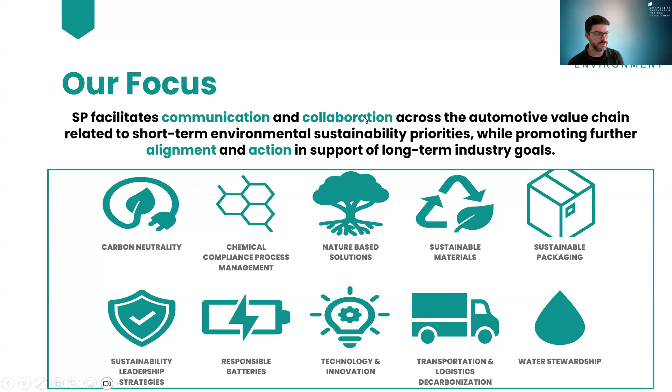As a quick introduction, for those who might not be familiar, Suppliers Partnership for the Environment provides a forum to bring automakers and suppliers together to collaborate around environmental sustainability goals for the automotive industry and the extended value chain. Our work today has focused on facilitating communication and collaboration across that value chain around shared environmental sustainability priorities and goals of our member companies. While those goals encompass many things, sustainable materials is one big component. In recent years, we have seen an increase in sustainable material content goals among our member companies and others in the automotive industry, and within Suppliers Partnership we have been working to improve understanding of the different ways these goals are set and measured and how they extend and relate to the supply chain.

For today's meeting, we're pleased to have two of our member company representatives from Ricardo here to share the results of some research they have recently completed on behalf of an organization in the UK regarding sustainable material trends, challenges, and opportunities specific to the automotive sector. To get us started, I will turn over to Andrew, the head of circular economy for Ricardo, to introduce himself and his colleague, Michael.

Thank you very much, and hello everybody, and thank you for joining our call today. As you've already heard, I'm Andrew Dunwoody, head of circular economy at Ricardo. I have over 20 years experience in the waste and circular economy sector, but I've been leading the circular economy team at Ricardo for just over 2 years now, where we look to create circular economy strategies, create circular economy indicators, and also promote sustainable packaging and procurement with our clients across a number of different sectors, both public and private, but obviously with a lot of focus on the automotive sector, where we have been working with tier ones and OEMs internationally on their circular economy approach for quite some time now.

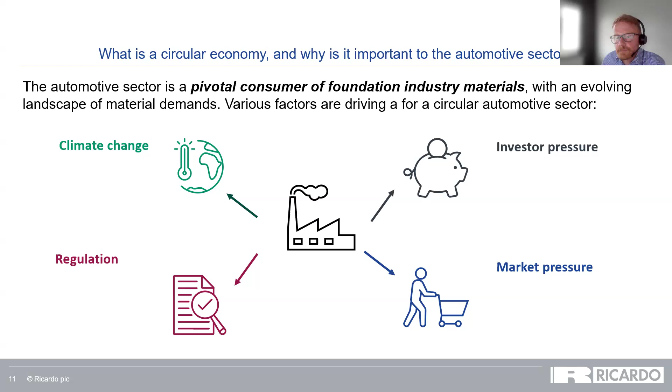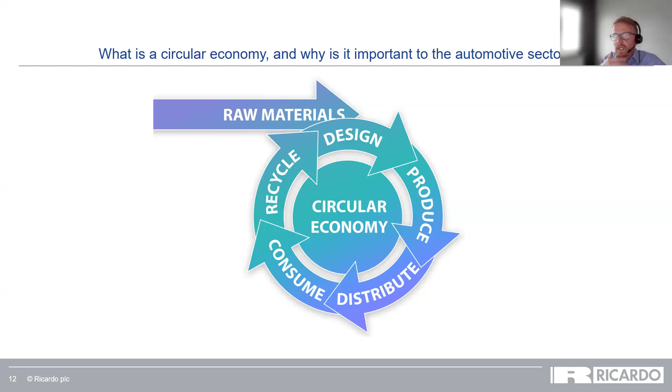This is how we like to graphically display the circular economy at Ricardo, particularly for the automotive industry. We've got a circular approach around a central thinking of circular economy, with raw materials coming in and, hopefully, in a decreasing way, as we look to reuse the materials we have so that there is no waste. In an ideal circular economy, we've eradicated waste, so there are no outputs, no waste or leakage from the system. It's no mistake that we have design at the top of our system, above production, distribution, consumption, and recycle. We'll talk more about design and the importance of circular design later, but this helps clarify what we mean by a circular economy for the automotive industry.

Before I go any further, I'd like to run a very quick poll with the audience today. Hopefully we'll get some voting buttons soon. I'd like to ask: what do you see as the greatest challenge with materials in transitioning towards a circular economy in the automotive sector? We've got five choices: high resource demand, reducing carbon emissions from manufacturing, growing costs, supply chain pressures, or policy and regulation. I'll give a few moments to allow you to vote, just to gauge opinion around the room on what people see as the biggest challenge for the automotive industry.

All right, we've got 70% of the attendees having responded. I'll give it another 15 seconds or so, and then we'll share the results. Thanks, Kellen. This is obviously very unscientific, but it's just a chance for us to gauge what you think before we go on with our presentations today.

Okay, I see we've got almost everybody, so I'm going to go ahead and end it here now. There is a very clear top choice here, so hopefully everybody is seeing that now. The top choice is growing costs. I don't want to brag, but that's what I thought might be the case. Thank you very much, Kellen.

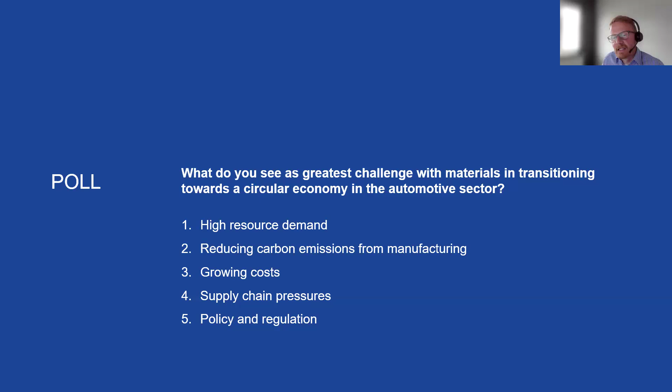We have got selections across each of the five choices, but we can see that growing costs is a real concern around the room, which is really interesting. Obviously it's just a very quick straw poll, but it's something we suspected, and hopefully we can continue to talk about that as we progress through the presentation. Thank you for participating. At Ricardo, we really see all five of those challenges as key for the automotive industry. It's hard to say that none of them are relevant or that one is clearly more important than the others, but each presents its own challenges and is important in its own way. The circular economy can help address each of those, and embedding a circular approach in the automotive industry is absolutely key.

When it comes to high resource demand, the automotive industry is very resource intensive, so providing a value retention type solution is really important. Promoting value retention through the retention of materials, components, and vehicles, thinking of things like remanufacturing and refurbishment, and looking at how continued ownership or material stewardship type approaches through different business models can help tackle that resource demand, reduce it, and help mitigate those impacts.

High emissions linked to greenhouse gases and climate change are something I've already touched upon. Recognizing that we have a climate crisis, reducing embodied carbon is something circular economy can help deliver as well. That's going to be very important for all organizations, whether in the industry or not, but it's somewhere circular economy can really help reduce embodied carbon and contribute to tackling climate change.

Growing costs have clearly been foremost among the minds of people on the call today, and I'm not surprised at all. But again, the circular economy can really help tackle that. Savings through recycled content, advanced recycling technologies, and end-of-life treatment are all things that can help tackle growing costs, and the circular economy can contribute to that through different business models and processes. Looking at that whole value chain type approach is something the circular economy can clearly contribute to.

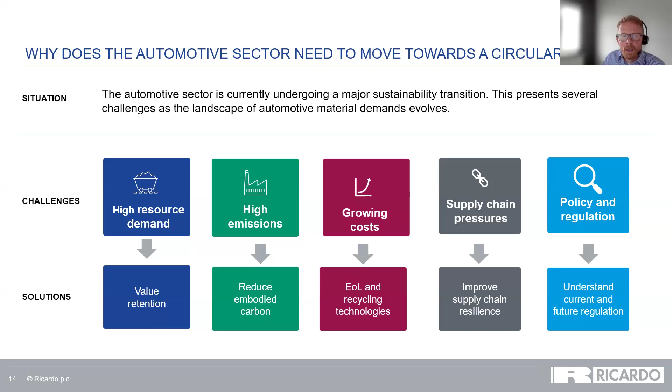Alongside those more general challenges, there are also various material innovation specific challenges. I've already mentioned the end-of-life vehicle directive here in the EU, which is of particular importance to us, and we think it's going to be followed elsewhere around the world. It's going to result in targeted legislation and challenges for the automotive industry. The top five we've picked out, which you'll hear more about in Michael's presentation, include the need to replace materials with alternatives to achieve lightweighting, contributing to greenhouse gas reductions and climate change impacts. There's also a need for lower carbon options, moving away from conventional materials, again linked with embedded greenhouse gases and climate change impacts.

There's going to be a need to increase availability of recycled materials — one of the key challenges we're seeing here in the UK for industries related to the automotive world, in how they can secure those recycled supplies and match the obligations placed on them by regulation. The need for innovative solutions that also reduce cost is going to be imperative, so looking at other sustainable materials or lightweight alternatives will be key to that cost reduction. And there's going to be a need for OEMs to improve the sustainability, performance and credentials of materials, again driven by this directive which we expect will be followed elsewhere — a key challenge for the automotive industry.

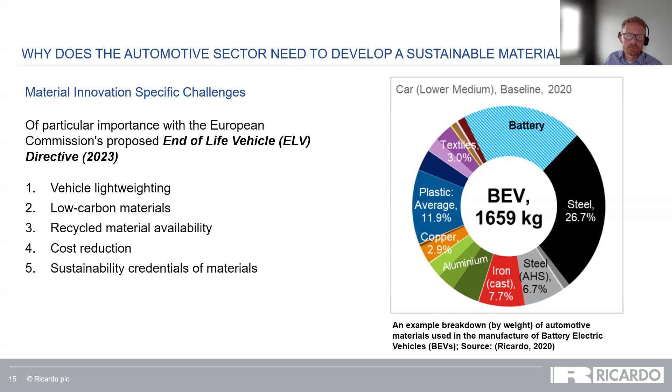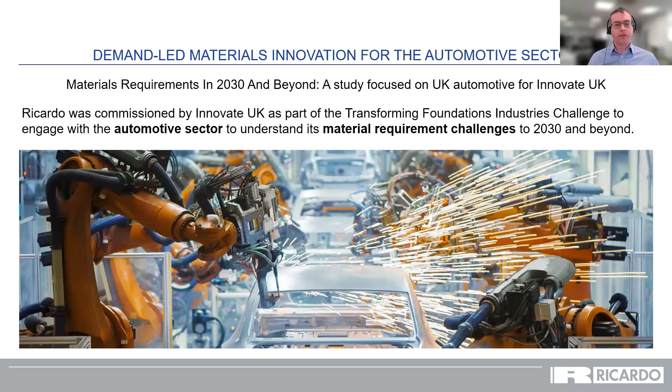So we're going to be looking at a case study we completed recently for Innovate UK, a publicly funded innovation agency tasked with helping UK industry grow through development and commercialization of new products. This project aimed to enable foundation industries to understand and adapt to the changing demands of automotive materials, against the background that Andrew has just been discussing.

So the automotive sector is adapting to produce electrified vehicles. Manufacturers will also need to decarbonize their production operations and supply chain, and increase the circularity of materials — all driven by the factors Andrew has been discussing. The supply chain includes foundation industries, with the automotive sector being a key demand for metals, chemicals, and glass, for example.

Foundation industries will themselves need to adapt to reduce their own carbon footprint while delivering materials that meet the future demands of automotive manufacturers. We're only one investment cycle away from 2050, by when the UK's foundation industries should have reduced their emissions by at least 90%. So there's a real challenge in terms of timing and investment.

This study aims to explore demand-led innovation for the automotive sector and how interventions could support the development needed to meet that demand through building cross-sector collaboration.

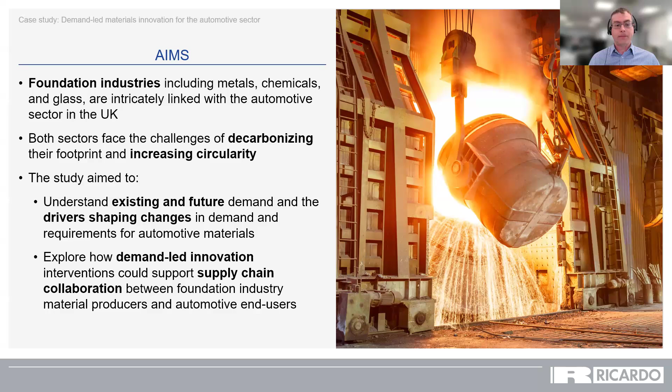Stakeholder engagement was at the heart of this study, including interviews with automotive OEMs and a roundtable workshop event with wider industry stakeholder engagement. This was used to build upon and validate the findings from a literature review, to explore the barriers and challenges and the potential for support through intervention.

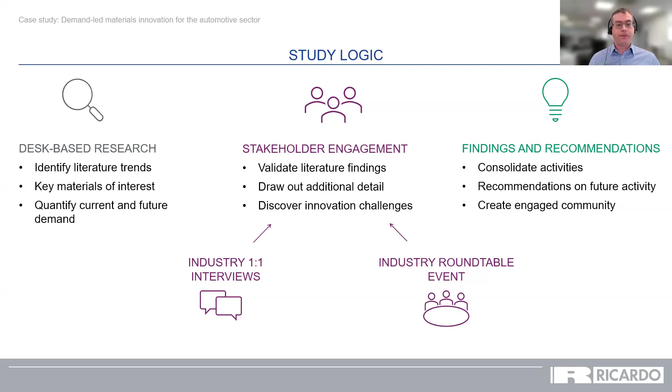Work commenced last October. An initial findings report, based on the literature review, was published in March. The roundtable event was held in late February this year. The findings were recently presented at the Materials Research Exchange Conference, organised by Innovate UK in London, and the final report will be published shortly.

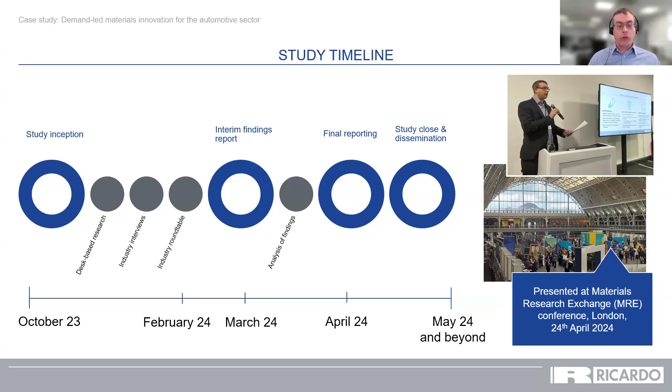The key material groups explored in the study were identified considering UK influence on their supply chain, their innovation potential, and the sustainability of the materials. The focus was on those that exhibit a high share of vehicle weight and significant UK production rates. Five materials were shortlisted.

Steel and cast iron make up the largest share of vehicles by weight, and are currently predominantly made using high carbon production methods. These are easy to recycle, but the challenging demands of the automotive sector mean recycled steel cannot always be used in vehicles, as it is usually of a lower quality. This is known as downcycling.

Aluminium is an obvious lightweight alternative to steel, and it can have a low carbon footprint, but it's not a like-for-like replacement, requiring different design and assembly. Its recycling faces similar downcycling challenges to steel as well.

Plastics and composite materials are attractive for reducing vehicle weight, but may be challenging to source sustainably and to recycle. Vehicles are using increasing amounts of copper with electrified vehicles and with additional wiring and electrical components.

Glass is a heavy material for which demand is unlikely to change significantly, and it's currently made with high carbon, energy intensive processes. It also has recycling challenges in automotive applications.

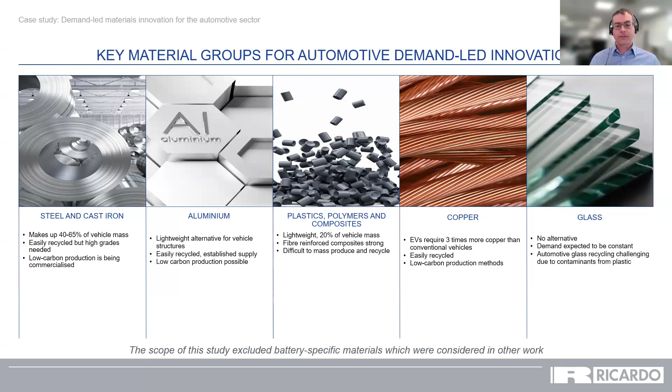Three key material innovation challenges were identified through the literature review, and these were reinforced through the stakeholder engagement. We have the reduction of vehicle weight, or lightweighting, which reduces the vehicle's in-use energy demand, and so the CO2 emissions from fuel use or the electricity production to drive that vehicle, reducing greenhouse gas emissions in the use phase.

Reducing the embodied greenhouse gas emissions in materials requires low carbon production methods, renewable power, and in some cases the use of alternative materials to give low carbon material options. Then increasing and improving the circularity of vehicles, which means increasing both the recyclability of the vehicle at its end of life and the use of recycled material in its production.

Recyclability means easy separation of vehicles at the end of its life. Increasing the recycled material use in vehicle production requires understanding and improving the quality of the recycled materials that can be used. These challenges can contradict each other; for example, lightweight materials may not be low carbon or easily recycled or recyclable.

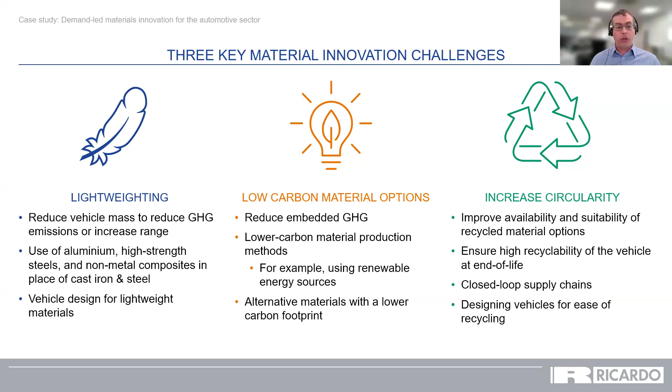Further challenges were identified that apply to all three key challenges of lightweighting, low carbon materials, and circularity. These are making innovative materials cost effective, which we saw in the result of the survey, and this is especially true when these materials are not being produced at scale, or at least not yet.

Ensuring materials are sustainable and understanding how sustainability is evaluated and compared to inform design and procurement decisions. Ensuring a robust supply chain for innovative materials, while also ensuring they are of consistent and suitable quality for use in the automotive sector. And commercializing and scaling up the production and supply of innovative materials means increasing capacity and upskilling within the supply chain.

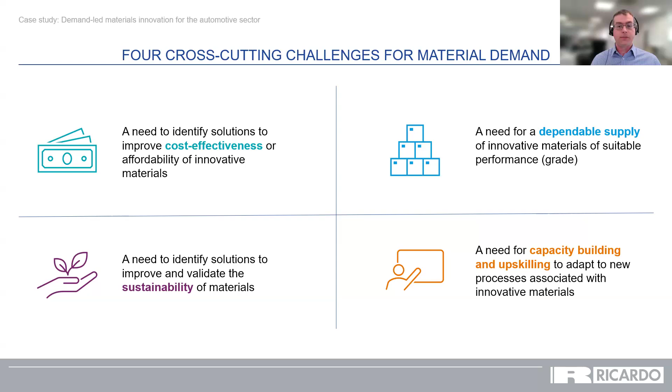The stakeholder engagement made clear the need for development in standards and policy areas to remove barriers and to incentivize the use of sustainable materials. These include ensuring materials meet the performance requirements or grades required of automotive applications, and that manufacturers have confidence to use them in their products.

Understanding the environmental impacts of materials over their full life cycle in a comparable way. Using regulations such as the European End-of-Life Vehicle Directive that Andrew had mentioned and its UK equivalent to increase the use of recycled materials in vehicles and to increase their proportion recycled at end of life, including specific targets for low-weight materials such as polymers.

Removing the barriers to and supporting the development of new recycled materials facilities, including reducing waste export to incentivize recycling, and enabling cost-effective access to renewable power and to green hydrogen supply for foundation industries, potentially through local schemes and clusters.

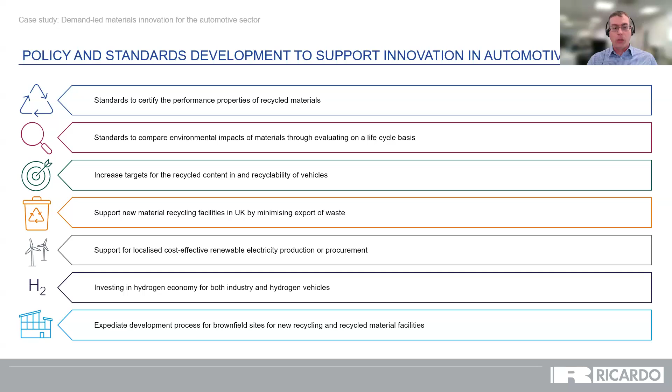So in terms of potential interventions that can address the key challenges, this was informed by the roundtable event, the stakeholder engagement, and Ricardo analysis, and we carried out a shortlisting exercise according to their relative importance, urgency, and relevance based on the feedback from that roundtable event.

Development of interventions can focus on overcoming barriers identified by supporting research targeted where the development of materials or production methods requires it, including cross-sector development challenges.

Using demonstrator projects to showcase how innovations in materials can be adopted in vehicles and how integrated supply chains can be used, and therefore providing confidence to both the automotive and foundation industries to invest in innovative materials and establish those integrated supply chains.

Research and demonstration project themes proposed include supporting the development of innovative material solutions with low environmental impact relevant for the automotive sector, exploring how lightweight or high recycled content materials can be deployed in vehicle production, considering design and manufacture. A particular challenge was identified around lightweight structures for heavy goods vehicles, given their loads and duty cycles.

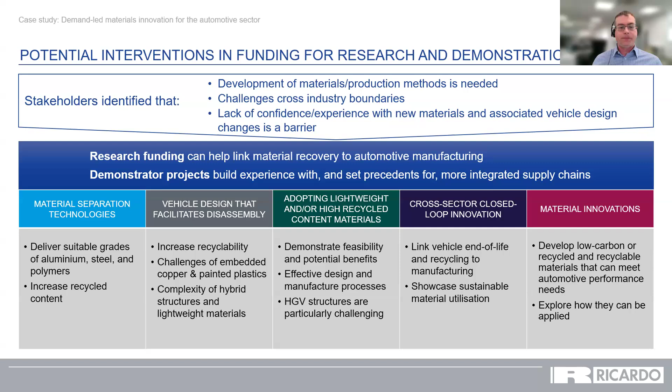Interventions that support building capacity can improve the cost effectiveness and dependability of the supply of innovative materials, and that removes the barrier for their use in automotive applications.

Significant changes in vehicle design and the materials they demand is expected to require rapid changes in material supply chains. This will require training to deliver different assembly processes that may be required for the use of those alternative materials and for enabling their disassembly.

Upskilling will be required within the steel industry in particular, as high-grade, low-carbon steels will be needed by automotive manufacturers.

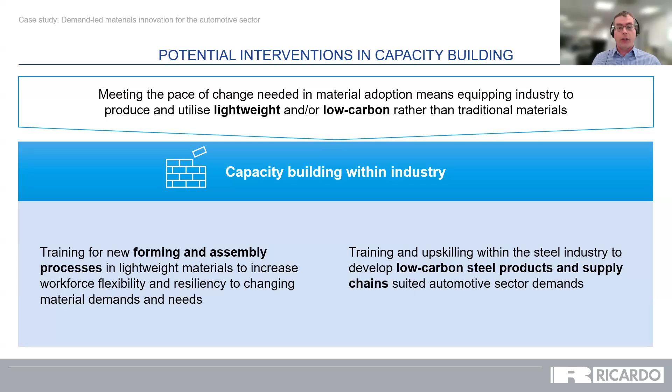Automotive manufacturers demand quality materials at scale and low cost. Scaling up production of innovative materials suitable for the automotive sector enables costs to be reduced and robust supply chains to be built.

This commercialization process requires investment, such as providing the larger and smarter facilities that will be needed to improve cost effectiveness and produce materials with higher grade properties, and financial support, such as loans and grants, potentially that can both support capacity building and commercialization, but also provide additional value in attracting private investment.

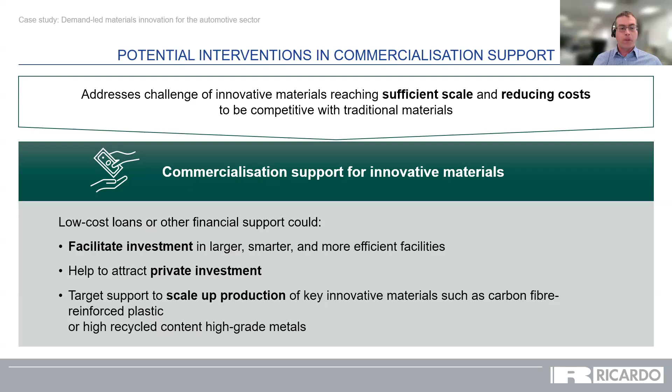The challenges identified in the study relate to both the automotive manufacturing industry and the foundation industry supply chain.

A key finding is the need for cross-sector collaboration to address and to overcome the challenges and to help guide interventions. An objective from the start of this study was that an output would be the forming of a cross-sector forum enabling collaboration.

Interested companies and organisations have been identified to initiate a stakeholder community within the UK, led by the Transforming Foundation Industries Challenge.

And so the project outputs the study website, which can be accessed via the web link there that will be shared afterwards, along with the slides.

The preliminary report, which covers the literature review, identification of key materials, and initial findings of the challenges, is already available on the website. And the final report will be made available on that website shortly as well. We expect it to be available very soon.

It's hoped that the findings will be useful to both the automotive and foundation industries and to policymakers, as well as to the study sponsor, Innovate UK, as they look to support industry in meeting these challenges.

And although the focus in this study was on the UK, many of the findings will also be relevant to other markets with common drivers to decarbonise vehicle production and material supply, as Andrew was introducing earlier.

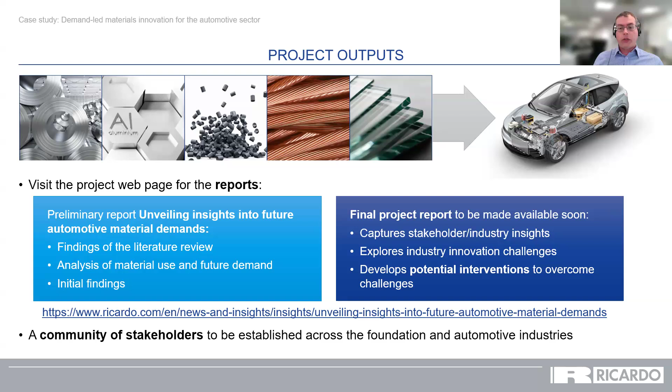So I'll now hand back to Andrew to take us through the next steps for automotive businesses.

Starting with recyclability assessments: improving the environmental sustainability of vehicles starts with understanding the current situation. Analyzing materials use, vehicle design, engineering, and production all contribute to understanding a vehicle's recyclability. At Ricardo, we've done this quite a lot, usually following the international standard on this.

We have a case study here of where we've done this recently for an automotive OEM in the US. They were interested in improving their sustainability approach and transitioning into a more sustainable company, and wanted to understand how their vehicles stood up under scrutiny in a robust and transparent way. We took their bill of materials from each vehicle they wanted us to examine, applied this standard, and tailored it for their exact needs, which was a key element of our offering. We then gave them clear, transparent, and robust information around the recyclability and recoverability of the two vehicles we looked at on their behalf.

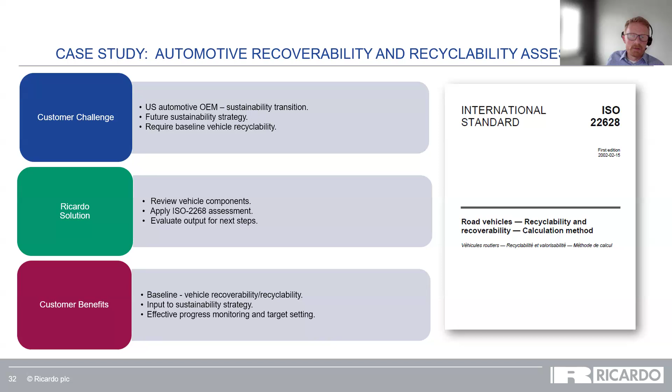One key thing here with using this international standard and tailoring it specifically for the company's needs was that it was very robust and fully transparent. So the company was able to report this with absolute confidence that there wouldn't be any comeback in terms of accusations of greenwashing or manipulating results to make them seem better than they were. They could be absolutely confident around the recyclability, and set realistic targets for improving their performance in terms of sustainable materials going forward.

Coming back to the other steps of a sustainable materials strategy, a materials market assessment is very important. With ever-increasing complexity of materials, the recycling industry has developed significantly over the past decade. Chemical recycling, the production of high-grade recycled plastics, and the recycling of EV batteries are some examples. Increasing governmental and consumer demands for sustainable transport has led to an increase in the reuse of recycled content. This is one of the key challenges for the automotive industry: securing that recycled content and incorporating it into new products, providing evidence so the provenance of that material is clear and robust, and avoiding any accusations of greenwashing or manipulating results is absolutely key.

Sustainable packaging is the next key element we see in a sustainable materials strategy. Packaging forms a huge proportion of any waste stream, and as I've mentioned several times this morning, we are looking to reduce waste. So looking at a sustainable packaging approach is really key to a materials strategy—whether that's changing packaging to make it more sustainable from a reuse or reduction point of view, or looking to innovations to make those materials themselves more recyclable or less damaging. It can be either, really.

At Ricardo, we've got a sustainable packaging team that's part of my role, and we're very able to understand and help people look at sustainable packaging innovations. We actually have a database of packaging innovations that we can use for our clients to help make recommendations around innovations that can improve their performance.

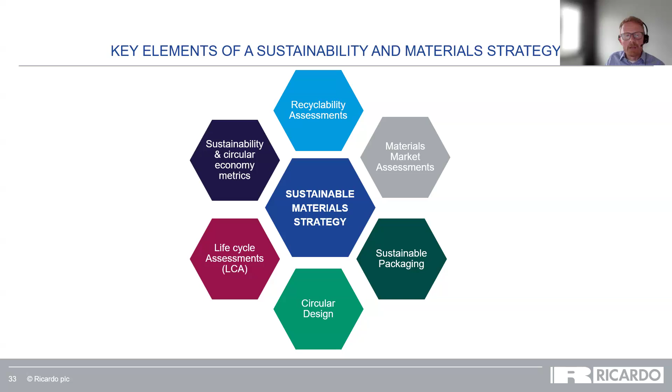So something that we would strongly recommend is that the automotive industry looks to embed robust and transparent circular economy metrics to be able to clearly report upon their activity, but then also monitor and report upon progress and successes as well.